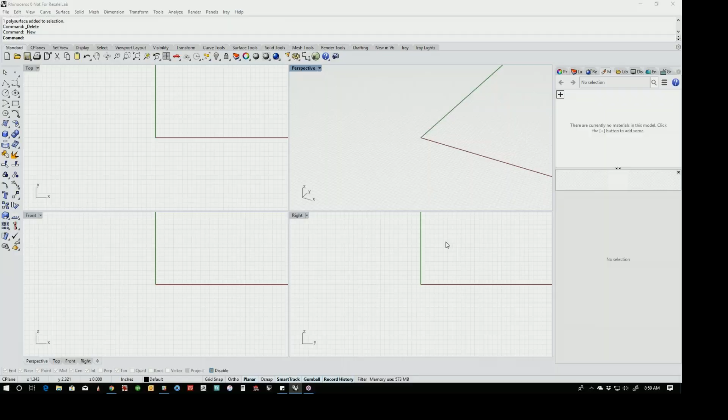I also run the Outside Digital Art and Design, and we like to do these videos probably about once, maybe every month or so. We like to do a Windows one and a Mac one, and the whole concept is it's basically a simple project that we can get through in about an hour, and hopefully I can show you a few of my bag of tricks. The difference between these videos and a lot of videos you'll see is these are completely unrehearsed, which may become very obvious here as we go.

I like to build these from scratch. I do a little scratchy, awful sketch before I start just to get going, just to decide what I'm gonna build, and then I build it from scratch. I've never built it before. It's not rehearsed. We're not Julia Childing anything by opening some layers and saying it looks like this. So we're going to build it from scratch.

If we run into a problem, we're going to fix it along the way because I want to basically simulate the same experience that you have when you sit down and do this stuff yourself. So if a problem comes up along the build, we're going to stop, analyze what went wrong, try and figure it out, and hopefully come up with a solution and allow you to see the workflow in all of its splendor and horror.

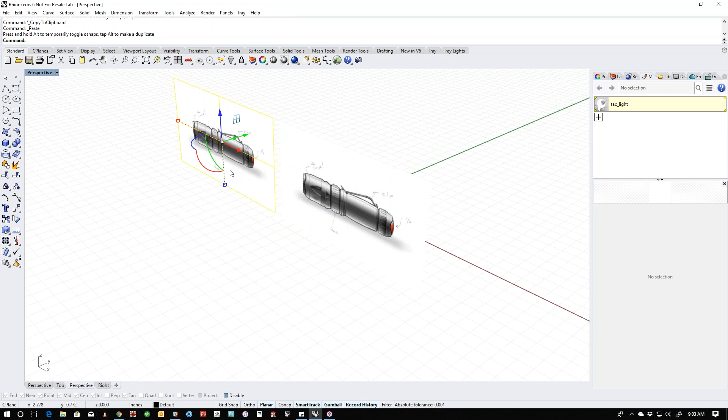When I do this stuff, especially if I'm freestyle designing, I like to start with at least some very basic reference. The picture command allows you to put something in the scene, and it also allows you to do things like - if this was a four view with a front view, side view, and top view on the same image - I could copy and paste this image, move it, place it here, and build a little reference grid. I could also drag this with Gumball and tap Alt, see that little plus that shows up, and make another copy of it, so I could have all sorts of different reference planes as I worked.

In this case, I've only got one view, so I don't need these, so I'm just going to pick them and delete them. But if I were to build over this as it sits, you can see the problem right off the bat.

My curves are black, my drawing is black. This starts to become difficult to see exactly what I'm doing. So I'm going to pick on the picture frame here, and go to the Materials tab. If you don't have the Materials tab open, right-click on any of the tabs that are already showing.

Come down here to Materials and just turn this on. That'll bring up a Materials tab, and you'll see there's actually a picture frame material. You can see the picture down here with the name of the file, and then we've got an object transparency down here, and I'm going to take this and slide it up. As I go up, the image starts to fade and becomes more transparent.

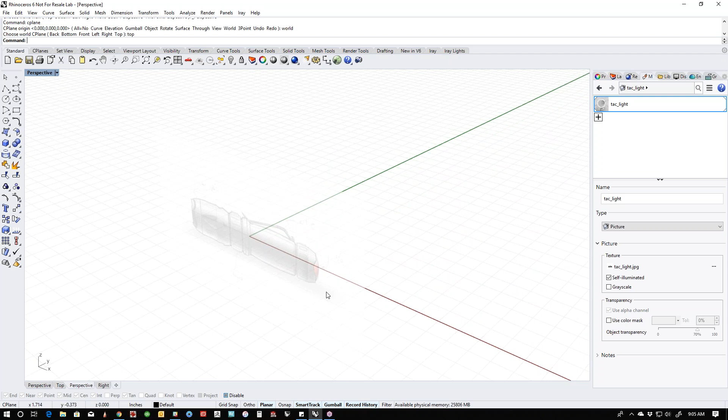And then it's just a suggestion of reference. It's not quite so overwhelming in the scene. Then the last thing I want to do is, if I were to model this, let's say for instance I built something over the center line like this, you can see right off the bat, especially if I go into shaded mode, you can see how the image kind of gets cut in half.

That makes me crazy when I model. I can't stand that. So what I'm going to do is I'm actually going to take this and just slide it straight back in the scene using gumball, so it's out of the area where I'm actually going to be modeling. But in the front view, it appears basically where I want it to be.

So that's kind of the whole concept behind what we're doing. I'm going to just eyeball this thing around the origin, and it's going to be somewhere around here. This is going to be a symmetrical object, so maybe I'll use this as a guide, that little detail right there - it looks like that's about centered. So I'm going to just let that roll right there.

The last thing I want to do with this image is I don't want to be able to select it while I'm modeling, because that's going to be a problem. So I'm going to come to my Layers tab. Again, if you don't have a Layers tab, right-click on here and just turn it on. I'm going to go down here and change this to image, right-click, change this object layer here, and then lock this.

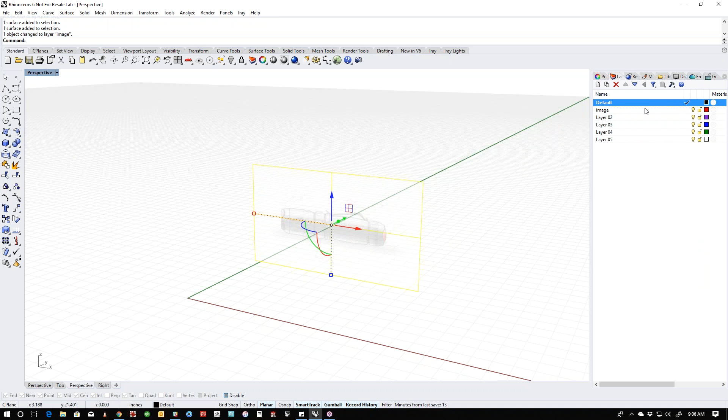I'm going to change my back to default as my working layer, and then I'm going to lock this. So now that this is locked, it just hangs out here. But the cool thing about putting it on a layer as opposed to just locking it using the lock command is I can turn it on and off with the layer, which is really useful.

Especially if I've got a bunch of reference - say I've got a front view and a rear view and a top view and a bottom view and all that stuff, and there's all this clutter in the scene that I don't necessarily need. I can set up a different image layer for each one - top, bottom, front, back, right, left, whatever. And then I can just come in here and turn them on and off as I need. So that's my favorite way of organizing stuff as far as reference material goes.

So this thing is a fairly simple object. If we start analyzing this kind of from a form point of view, we can see right off the bat that this is kind of a revolved object, right? This is dying for being revolved, and then it looks like it's got some opportunities for some detailing that we can either do with booleans, or we can do with trims, or whatever. There's a bunch of different ways we can handle this.

So the things that we have to decide right off the bat are which of these pieces are going to be connected in a single unit. I basically think this whole head is probably going to be a single unit. It's probably going to travel through here, so this whole thing is probably going to be the same. And then maybe I want a material change here or a material change here, some knurling or some opportunities for that.

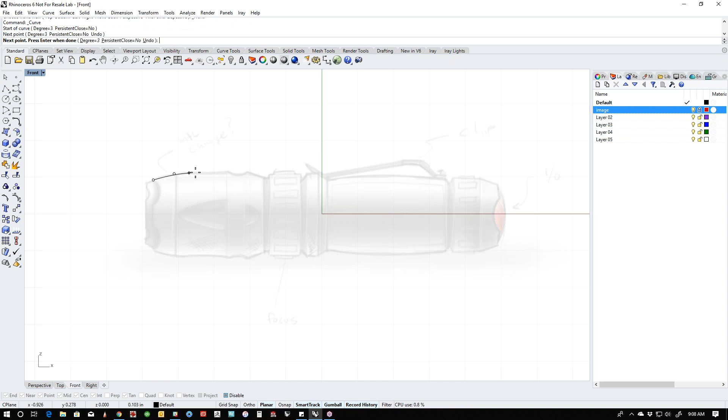If I were to just draw this thing and revolve it, this would all be a single object, and if I applied a material to it, I wouldn't have any opportunities for breaking this thing up and putting detail on it. So instead I'm going to build this out of individual pieces.

I'm going to start with a 3-point arc, then draw a line, then do another 3-point arc, and draw another line. I'm not hitting my arc dead on, so I'll go back and adjust it a little bit. I'll pull this through and come up like this, and because this is a polyline, each time I click it's essentially going to make a new surface.

So if I explode this, each one of these pieces are individual. That means when I revolve this thing, each one of these is going to be a separate surface as part of a poly surface. Does that make sense? So let's go back and adjust, and hit our arc a little better.

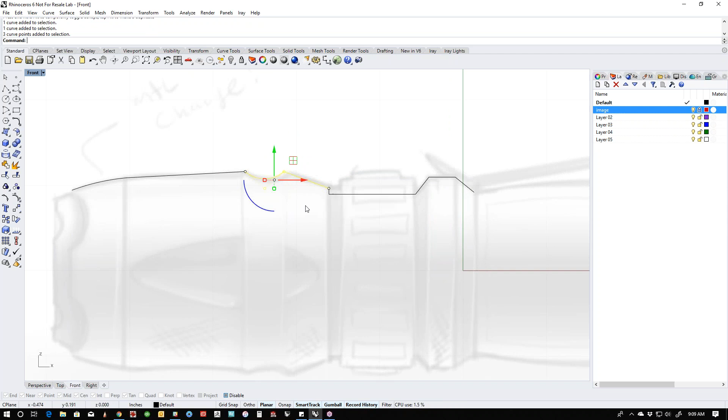I'm going to pick these, turn my points on for all of this stuff, drag select these and move them with gumball. Let's get these guys a little closer. I'm going to use nudge for this because it's super easy.

If you don't have nudge enabled on your machine, let's do that. Go Tools, Options. Down here in Modeling Aids, there's a piece, if you open that, called Nudge. I have it set up to just use the arrow keys. You can have it set up to use Alt and the arrow keys, but I have it set to use arrow keys.

So the nudge key alone, just the arrow key, is going to be this unit. Control plus nudge is going to be that. And Shift plus nudge is going to be that. So arrow key, arrow key, arrow key - Control and Shift add on to that. I find that's especially useful for point editing because it gives you an easy way to get it exactly where you want it.

That's a little closer to what I was hoping for. Let's go ahead and finish this. Again, this looks like a big arc, so I'm going to do that with another 3-point arc. There's probably an official name for that. I'm going to shift drag down this way to place the second point, then just pull the middle point up like this, so I know this point and this point are lined up.

I'm going to just draw this little valley. This comes out here like this, and then we want to get back somewhere to the origin. I'm going to overshoot it because I'm going to trim it off. I'm going to do the same thing down here and draw a center line from zero, which gives me my axis to revolve.

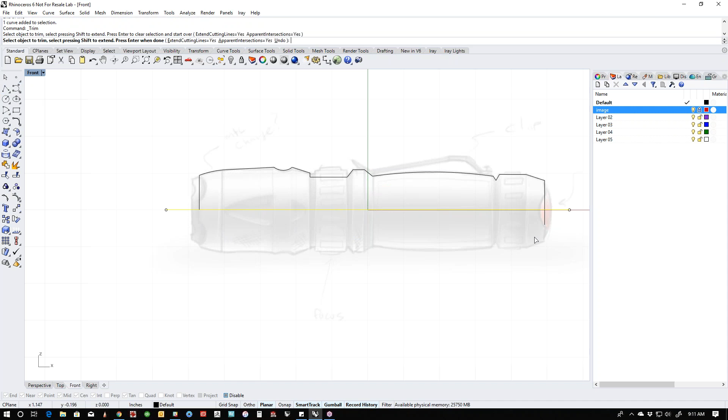Then I'm going to take this entire thing right here and join it, so this is now a polycurve. Now, this actually has a recess in it where this thing sits. I can either draw that now or do it later with a boolean or something like that. I think, just because I tend to be a little lazy - which I like to refer to as efficiency, but other people refer to as laziness - I'm going to go ahead and draw the core of this thing in here so that it's available for me when I revolve this.

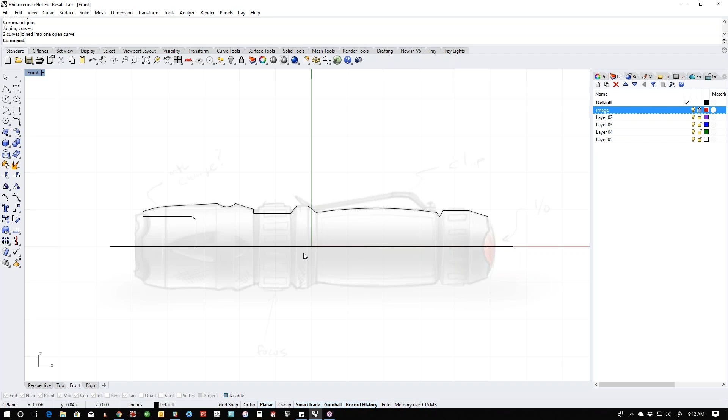So I'll just take this and trim it, take this and trim it, and that gives me, once I join it, the body that I'm going to make. Now I have this piece here, this ring - I might make that with just a cylinder later. So let's just revolve this so we can feel like we're making some progress.

Come up here to the revolve tool. That's our axis, and we're going to do a full rotation. If you look up in the command line, there are different pieces of this word that are underlined - see how under full circle it says U? So if I just type U, enter, I get the hotkey for full circle. All right, and that's basically our flashlight at this point.

Now, there was also a recess down here where the button is going to land, and I'll show you a cool trick for using subobject selection to add that detail later. But let's resolve this thing right here.

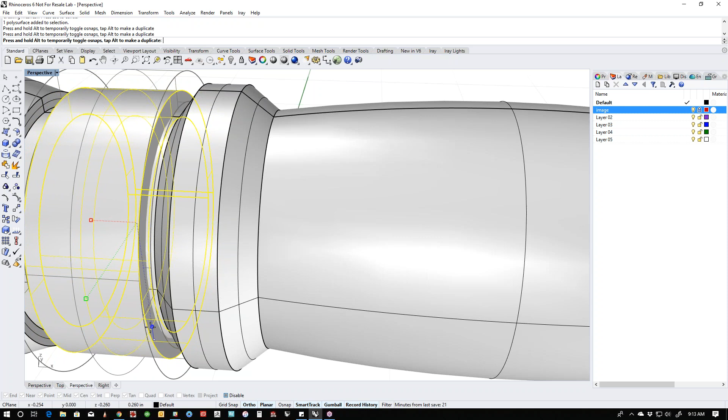So let's put a cylinder around this. I'm going to go to the right-hand view, and let's do the outside ring and then the inside ring, and we can always change this. I'm going to pull this down like that. It looks like I overshot the size, so I'll scale it down a bit, shift drag on the handle. My mouse is dying, it's been misbehaving lately. So I'll tuck it in there like that, and go to the front view, and it needs to be a little wider.

It looks like on my art this outside ring is a little bit thicker. So I'm going to shift scale the entire thing up and then bring this in like that. And if my inner ring is too big, which it's not bad, if we're calling this a rendering or whatever, it's not a hugely massive big deal.

But there's a cool trick we can do. We can shift control click to subobject select part of a polysurface. This is a polysurface, right? If I click on it, the whole thing lights up. If I shift control click, I can click on this inner surface, and then hold down shift, click and drag, if my mouse would behave, and I get a subobject selection, which allows me to make this smaller.

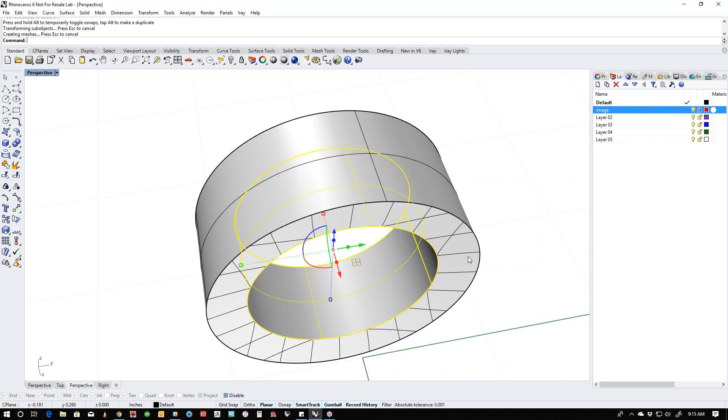Now, you'll notice that this rebuilt. That's because this was a degree 1 surface, and because I scaled this thing, it's actually a little bit narrower than the original one. So this changed from a degree 1 to a degree 3 surface, which rebuilt, giving you this detail here.

I can put this back to the same width, and then all I have to do is shift click, or control shift click, and then put that back just using a planar surface if I need to. I don't even really care, because the other surface was fine. There was nothing wrong with it, it was just a little bit more complex.

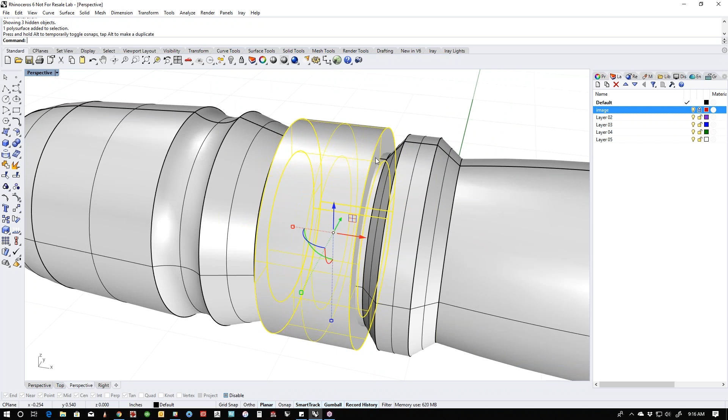So now you can see that we're actually intersecting this. So if I was to do a boolean, I would know that would work. And I'm going to push this a little bit forward, because I want that to have a little bit of space there and a little bit of space there. So this is like a little adjuster ring for focusing it or something like that.

I don't know. So let's talk about the back. Now the back, I should have drawn this so that this little detail was already pulled in like that, but I didn't. So I can fix that by coming in here and right-clicking on explode, and I can extract this surface. And then watch this.

I'm going to shift drag to scale it in a little bit, and this is going to be my wall thickness. Then I'm going to make a little planar surface between there. I'm going to join this back up, and that seems a little counterintuitive, except I can shift control click, and then this little round dot on the gumball, watch this.

I can now just extrude that in and make that little detail. So these gumball superpowers, this ability to subobject select and move things around is really cool, and we were getting into that in V5, but it's been refined in V6 to the point where it's much more useful and much more stable.

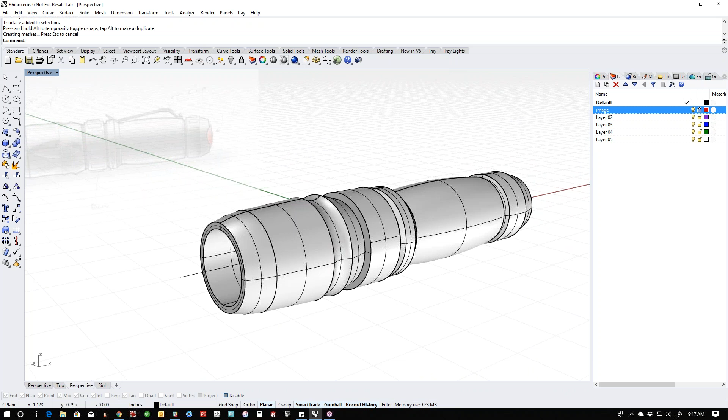All right, so let's start detailing this thing. Let's start with the most prominent feature, which is this kind of finger grip thing here. There's a cool trick we can play with this using history and intersection.

So what I'm going to do is start with an ellipse, and I'm going to... man, this mouse is dying. You know you're a computer nerd when you can ruin mice. This is probably my 3rd or 4th mouse in the last year. So what I'm going to do is pull this thing out,

and I'm going to intersect it in here. You can see that it kind of does what I need it to do, but I don't really know if it's exactly where I want it to be or not, or whether it's the right shape. So how do we figure that out?

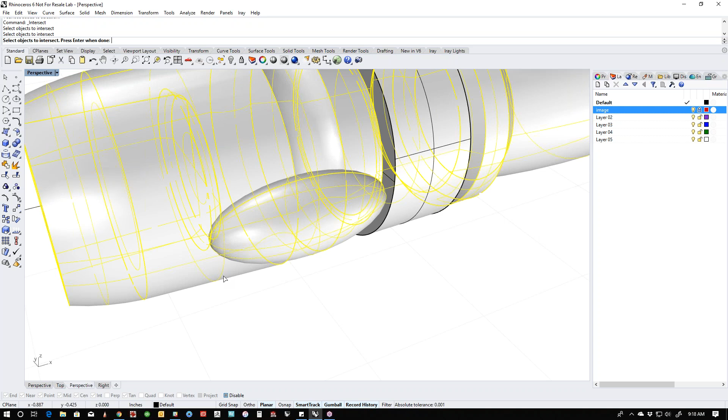First of all, make sure that history is on. Make sure that record history is on, and then always record and update children. Make sure those 2 things are on, and make sure that this is highlighted. And let's go down here to the object intersection, and we're going to intersect this with this.

And you can see what we get is a curve. Now, if I go back to my artwork, I can see that this curve doesn't match my artwork. It's close back here, but it doesn't really match. So what are we to do?

So first of all, let's make this so we can see it. I'm going to go to my properties, and I'm going to change this. Instead of being the display color by layer, I'm going to change this to red so I can see what happens.

Now watch this. If I scale this thing, like say we'll scale it in one direction, when I scale it, my curve updates. So that tells me where the intersection is happening. And it's a little, I overshot it a little bit on this way, so I'm actually going to nudge this thing back a little bit, and I'm going to gumball it just in a little bit, and then I'm going to make it a little fatter.

And I'm getting closer to what I want, right? Now, it's kind of not the right shape, so I can even turn on the points for this thing and edit it if I wanted to. And in this case, it's a degree 2 object because it's an ellipse, so it's not going to edit nicely.

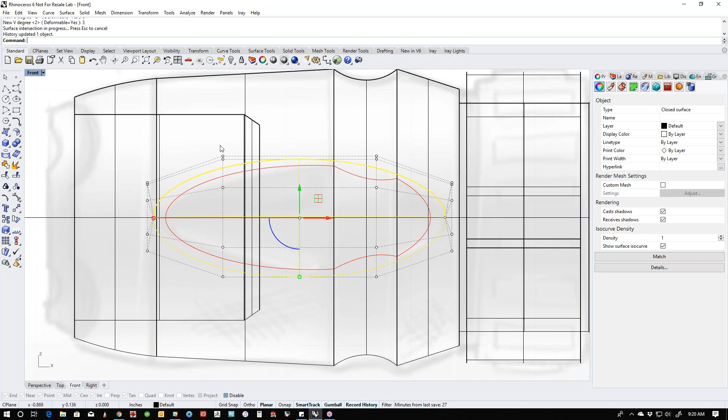So I'm going to change its degree. And if you don't know what I'm talking about there, don't worry about it. It's not super crazy important, but I'm going to just change this and make this a little bit more nicely editable object. So now I've got some points that I can mess with, and so I can come in here and I can scale these points in 1D and see how my curve, I can just sneak up on this.

And so now I know this is exactly the shape I want, kind of. So this curve is matching my artwork more or less exactly how I wanted it to. And I'm going to pull this back a little bit because it's still a little short. There we go. So we've matched here.

We've matched here. I learned this when I did automotive modeling, and it was the way that we made pockets for door handles. They didn't want door handles to be a trimmed surface, and so the pocket behind the door had to be a Class A surface, and so this was the way that you would get the shape of the pocket by using a surface. You'd overbuild two surfaces, intersect them, and then modify the pocket surface so that it matched the shape of the opening that you wanted. And it's kind of a trick that I've kept stealing over the years.

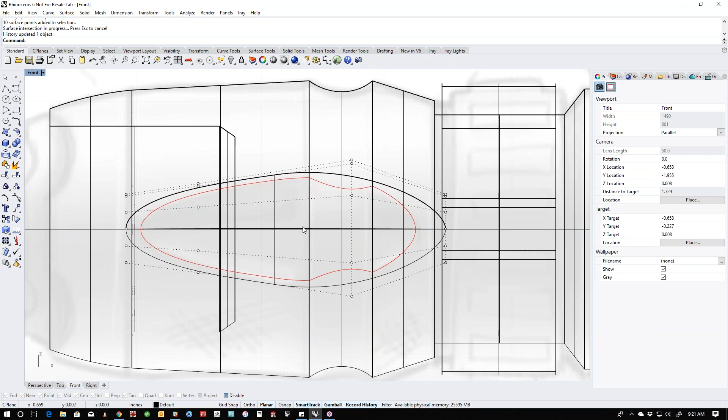Now you'll see that this intersection curve is also, it's getting into this, right? It's getting into this stuff which I don't necessarily want. So what I'm going to do is I'm going to save everything right now because I haven't saved anything yet.

And then what I'm going to do is I'm actually going to come in here, right click on this. I'm going to extract the surface. I'm going to change this to copy, and I'm going to copy this surface. And then I'm just going to hide it. Because it's, actually I don't think my copy went through.

All right, let's try that again. Have to actually hit the right tool. All right, so that's still connected. Let's go over here, right click, copy yes. That's my copy right here. I'm going to hide this for now.

And then I'm going to run my Boolean. And the reason that I'm going to do that is because I'm going to Boolean this. It's going to ruin this surface. I'm going to just remove that surface and then put it back with the one that I just hid. So I know this is in the right spot now, right? Because I've determined that this is making the right type of shape.

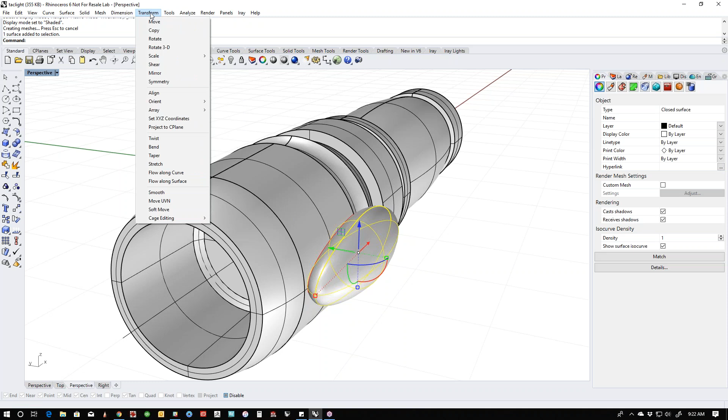So let's do our polar array because this needs to array around here. So tool, transform, array, polar. And we'll do this from the right view. And we're going to just go from 0. Let's do, I don't know, let's do 5 of them. See what it looks like.

So I think that's probably all right. 5 of them is probably enough. If you want to see what it looks like with say 7, you can just change it up here. And that's probably too much. 6 is, 6 probably. I like 5. Let's do 5. And then right click to accept.

And there's all your Boolean objects. So let's go ahead and run that and get the result. So I'm going to Boolean subtract from this using these guys. And if we're living right, this should have worked.

I always keep my Booleans. There's an option when you do a Boolean, by the way. Let me undo that and I'll show you what I'm talking about. Everybody's like, what are you talking about?

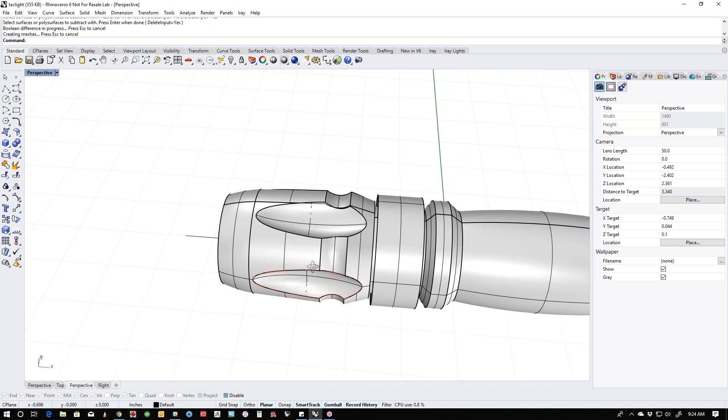See how up here where it says delete input? If I deleted the input, it would just delete those things. But I don't like that option because I like to be able to mess with this stuff later, so I usually keep that. I use delete input no, and that way I just take those pieces and stick them on another layer. The reason I do that is because a lot of my clients are kind of fussy, and I'll do something and then go, I want those to be like 3% smaller, which means I'd have to untrim and redo all this kind of stuff if I didn't keep the stuff I was originally looking for. So I tend to just keep everything.

So let's show that surface that we hid, and let's take a look and see if it makes sense. If I were to stick this back in here, let's just cap this thing, we can simulate what we're looking at. This looks like, now that I'm looking at it, this is going to be a sharp edge, and I don't like that as a design element because it's going to be sharp against your hand. So I'm going to delete this and go with what I've got here.

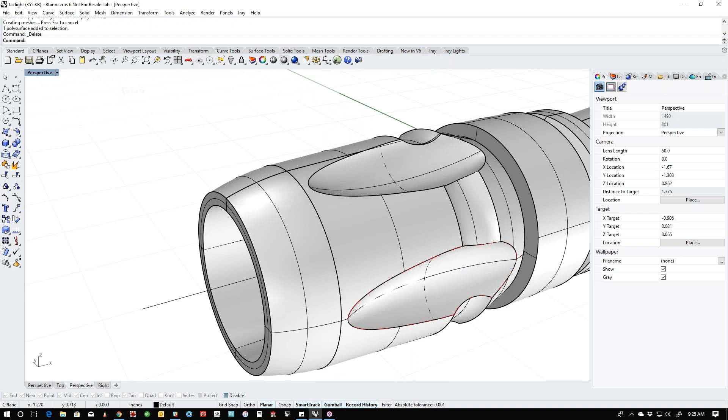But maybe what I'll do is add a little secondary detail that would be interesting through this thing. Maybe it's a ring. Let's try that. Let's see what a ring looks like.

Now what I'm doing is I've used Rhino as a modeling tool, right? Now I'm using Rhino as a design tool, and I'm looking at this stuff in 3D, and I'm making my decisions based on what the thing looks like in real life as opposed to looking at my dopey sketch.

So maybe this has to be bigger. Maybe I want a fatter ring, but I want it smaller. That makes sense. So let's do this.

Let's change the construction plane so that we can actually see what's going on. So what am I going to make the construction plane? Let's make this the construction plane. And if we wanted to, we could actually move the construction plane so that it's exactly where we wanted it to be.

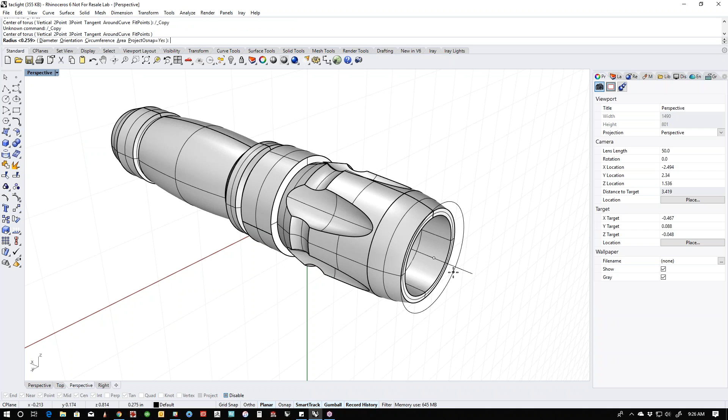But I'm not super concerned about it being perfect. I just want it to be in the same neighborhood, so when I make this thing it's in the right orientation. So let's make this a little fatter.

Maybe this is like a rubber ring or something, I don't know. And that's a little silly, I don't like how that looks. So let's make it a little smaller.

I don't hate that. Not super in love with it, but I don't know. Maybe we'll put a pin in that for now and see how it feels as we're going along.

So let's take a look at this piece. Now this piece, I want to kind of knock the edges off of it, and I'm going to do that just with a simple chamfer. I'm going to come down here and knock these off. This is obviously way too big, so I'm going to interactively just drag this down until I think it looks about right.

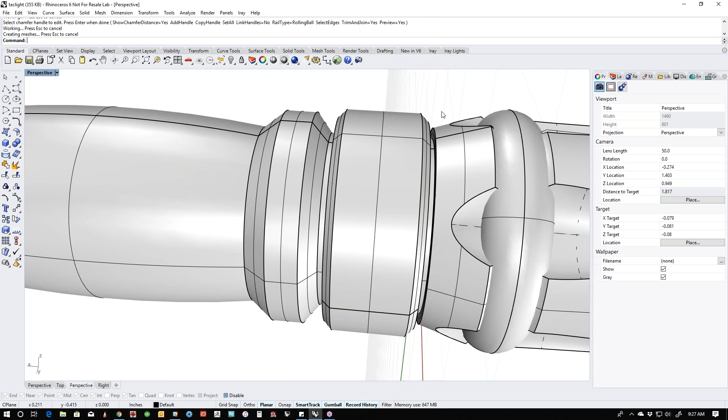And then I'm going to look at this number, I don't know if you can see this or not, but it's 0.024. I'm going to just set this to 0.02, that way the numbers make sense. And then let's preview it, see if we like it. That'll work. So I'm going to right click to accept.

I've decided I don't like this. I'm going to just let that go through there like that, because this could actually be a cool little material thing. This could be brushed, this could be anodized, this could be knurled. We could do some stuff like that. So I'm going to get rid of that.

Make an executive decision. Now this has these little focus rings on here, these little focus pieces. I'm going to just make those with cubes, and stick it somewhere like this. Then let's go to the top view, like that, and center it.

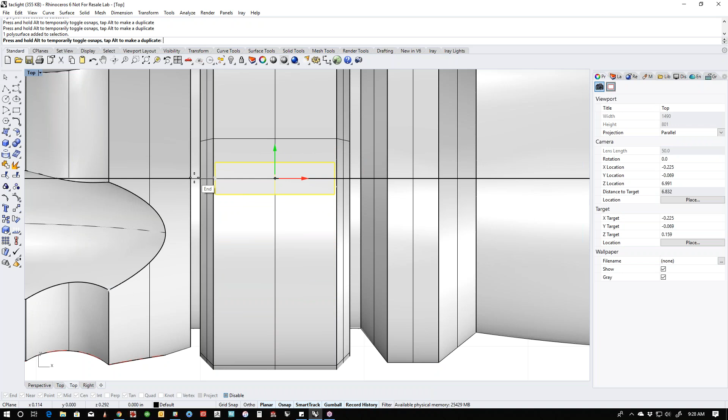Are you guys using snappy dragging with gumball? If you come down to your gumball options, are you using snappy dragging or smooth dragging? Smooth dragging is the default. Snappy dragging is an option, and what it does is allow your gumball to respond to O-snaps, so if I wanted to snap this right here or right to the center, I can do that.

Look at that. You didn't pay anything for this. You're already getting stuff. It's like knowledge, but for free.

All right, let's do a polar array around here. Transform array, polar. I'm going to use the center of this object as the center of the polar array, and let's do maybe 15 of these and see what we get. Now it's in the wrong plane, so let's fix that. I'm going to show just these two objects and hide everything else using the isolate command—watch this, boop, everything goes away except that.

So let's polar array this again, now that we can see it. Transform array polar 0, and let's do 15. That's probably all right, we could maybe do 17. Maybe 22—yeah, that'll work.

Now here's the cool thing. Keep in mind, we did this with history on. This is our original piece, the parent object, and all the rest of these are children. Watch this—hoping this works.

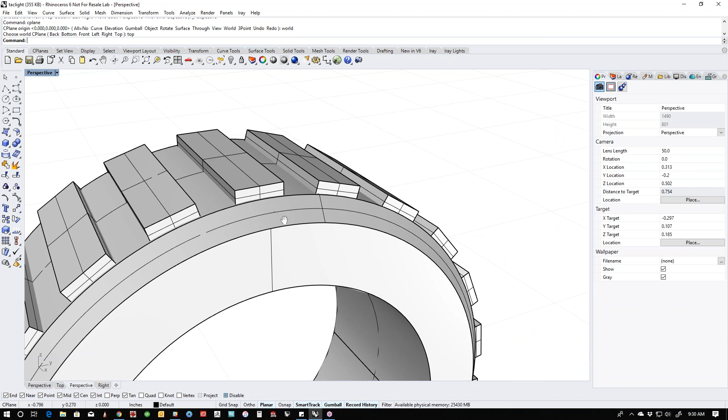If I go in here and chamfer this object using a very small chamfer—set all 0.1, set all 0.01, that's better. Maybe I can go even smaller. There we go, set all 0.005, and I right click it. If I'm doing this right, history should update all these. Boop, and it did.

So now I can make little design choices. If I don't like that to be a chamfer, I can undo it and change it to a fillet, using a very small fillet. Now it fillets all of them.

History superpowers. All right, let's grab all of this and boolean it together. And it did boolean—booleans work much nicer in V6.

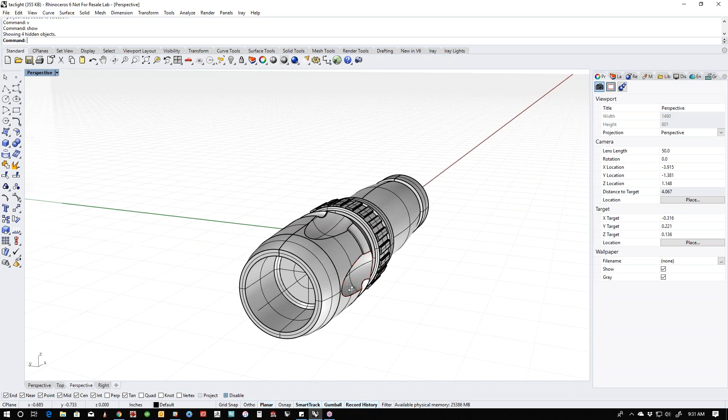All right, so we've got our little focus ring. How are we doing? Everything else is good. Now this thing, if I'm looking at the sketch, it has a little pattern detail in here where the handle has these sections on it that are milled out. And that's actually kind of a tough little thing to do, believe it or not. So let's sort through that.

So what I'm going to do is actually draw this, starting from here. I'm going to draw this, and I'm actually going to project this onto the model. The world's noisiest garbage cans are coming by my house—I apologize for that.

Or garbage trucks. So I've projected this on, and I get this curve, right? Now if I go to the top view, and decide this is kind of where that needs to be, and project this on, I'm using a couple of different views to build what is eventually going to be my trim curve. So I've got this curve and this curve.

I'm going to isolate those, and if I take these and trim them—let's go to the top view—so they're all trimmed together, I've got the curve that's going to make up my panel. So let's take this and join it.

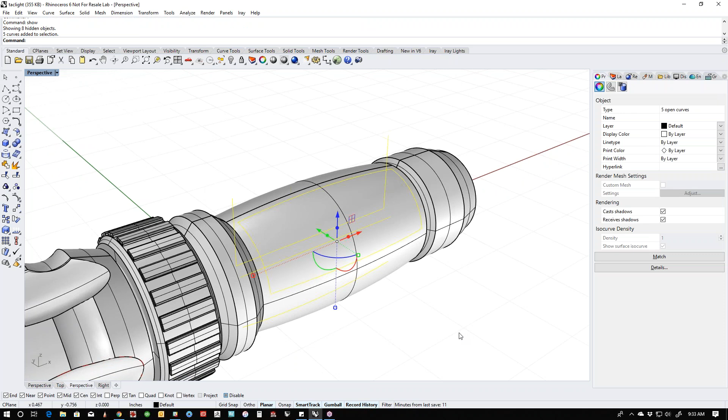And then I can take this and polar array it from the right-hand view, and I'm going to do that 4 times. And that gives me the curves I need in order to be able to split this thing up.

All right, so now I need to work on this particular surface. I'm actually going to extract it for now, not copy it, and take these curves, isolating everything else—actually, I'm going to hide this stuff too. Then I'm going to take this object and instead of trimming it or doing anything crazy, I'm just going to split it, using these 4 curves. And what that should do is give me these panels.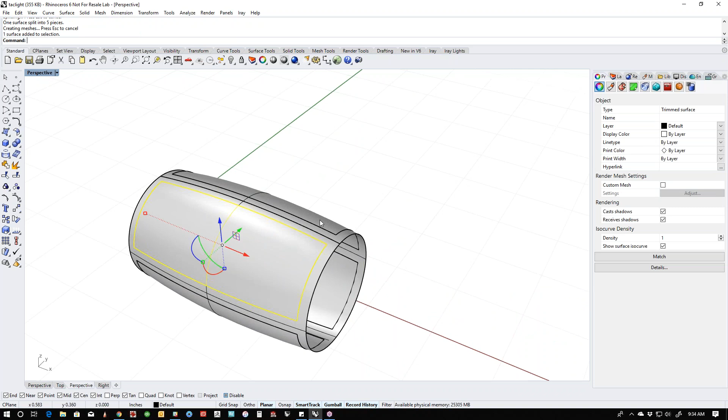Now, there's a couple of ways that we can do this. The cheaty way is to take all of these, go to the right-hand view, and shift drag scale them to whatever you want. And what that's going to do is pull those all in just a little bit. It's also going to suck them in a little bit.

Got to look at them in a couple of views. So they got a little shorter, a little farther in, but also notice that they overlap here, which we don't want. So I'm going to take this side and scale 1D from here. Like I said, this is the cheaty way of doing it. It's not super crazy accurate, but it'll work.

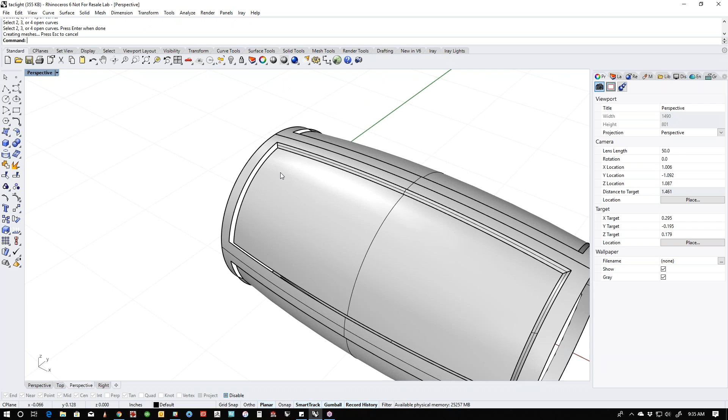And then I'm going to take these and just mirror them across the center line using the mirror command. So now I can simply go through here and loft this stuff, or use edge curves, 2, 3, 4 curves, whatever I want. Doesn't matter, however you feel best attaching this stuff.

Now, the other thing to notice is, if I look at this from the front view, I have the same problem. See how these are dipping under that a little bit, and that's not necessarily what I want. So let's fix that. I'm going to take this and scale it 1D straight up a little bit, and that fixes that problem.

Now, the cool thing about this, since this is symmetrical, if this is the panel that I like, join it, go to the right view, transform, polar array. It should drop it in there so that all that joins up.

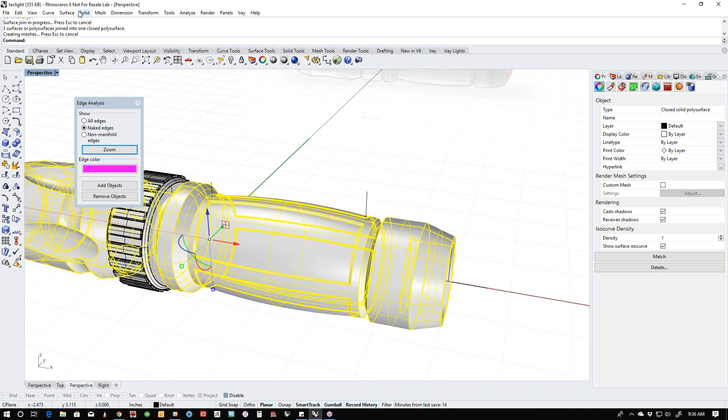And we can check it by using show edges, which lives down here. And so we've only got 2 open edges on either side. The pink is the open edges. So if we bring this back, join it back up, closed polysurface, which is what we want.

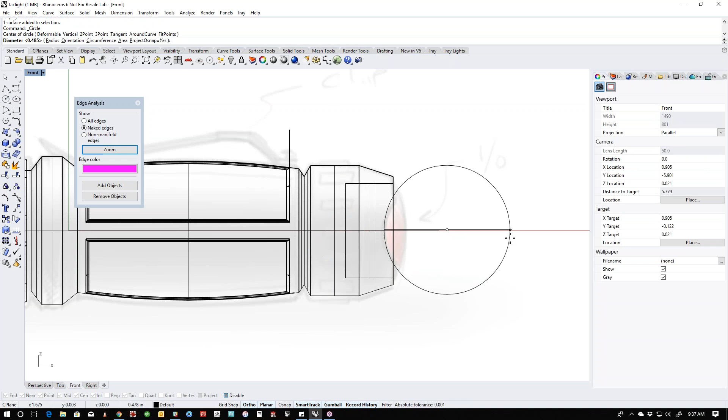But let's get this first, and I'm going to just simply wire cut that. That's going to be easy. So I'm going to draw a circle that matches, run the wire cut command, and run that right through there. And what it does is it just takes that wire and rolls it right through there. Like I said, I keep my boolean objects, so I manually delete it later.

So let's pull some gumball superpowers and make our button on the end of this thing. Watch this. I'm going to shift control click, start dragging, and tap alt, and it makes a copy of that surface. I way over dragged it just for illustration purposes. I'm going to use snappy dragging, and stick it back to where it came from, somewhere in here like this.

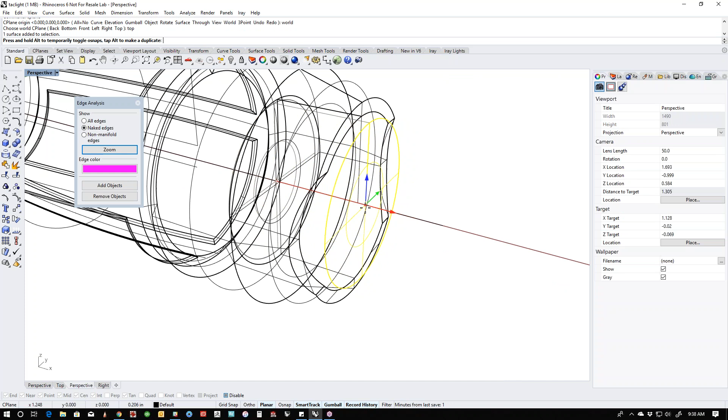Actually, let's go to the front view and wireframe. I'm going to stick this down in here like this. Maybe I'll overshoot it a little bit, shift drag for scale, and then start dragging this thing out, holding down the control key when I drag, and that gets me a little button. No modeling tools other than Gumball. We just did all that with Gumball.

All right, I want to round the edge of this thing off, so I'm going to just do that with a simple fillet. Actually, I might do it with a blend instead. Fillet on the left button, blend on the right. I like blend because it uses continuity as opposed to a circular fillet. It gives a little bit different shape.

So there's our button. Cool thing is we also have a separate surface here that we can use for a little texture blip. So I might actually add a little secondary detail on this thing by shift control clicking, and then just extrude that in a little bit using Gumball. And it gives me a little opportunity for a texture break. This is probably going to be a soft object right here, so maybe what we want to do is just knock the edges off this just a tiny bit.

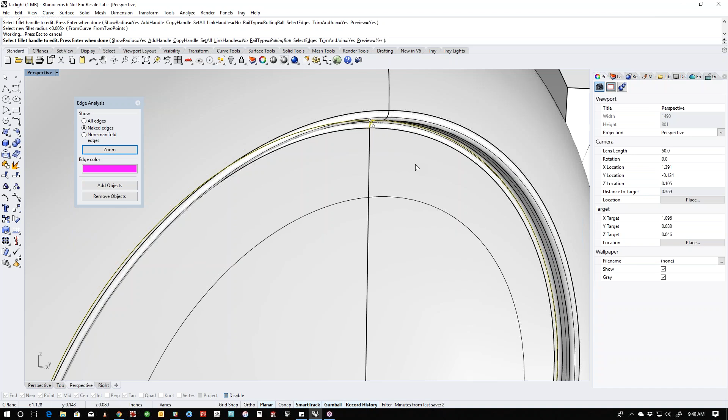Something like that, a little bit less. Don't want to intersect our fillets together. So that's a little softer looking, but still gives us this opportunity for a material break.

And these things are sharp, these flashlights. Every time I was taught in school, anything handheld, you always knock the edges off so it's not sharp. But these tactical flashlights are supposed to be really sharp and pointy. So I'm going to use that to my advantage and not knock all the edges off this thing, and leave it very, very hostile looking.

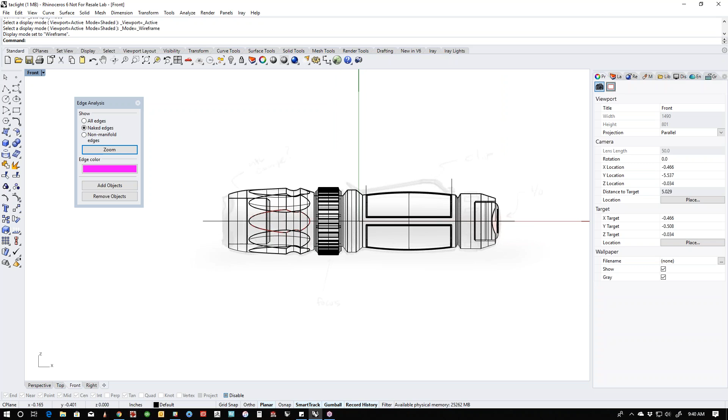It's a very angry flashlight going to the trash. Scares the hell out of the squirrels and the raccoons. I just imagine walking through the park, and somebody comes up to mug you and you pull out a flashlight - back up, I've got a flashlight! I don't know, am I the only one that thinks these products are hilarious? They're fun to model, but I think their usefulness is pretty silly, actually.

Oh my goodness, all right, so let's build these little crown details on here, and these are a little bit wider and a little bit shallower. So I'm going to just draw a circle like this, and I'm going to make a little object out of this.

I'm just going to pull it out using Gumball. And the thing about Gumball, the way it works: if I have a curve and I extrude the curve, I get a surface that's open. If I have a surface and I extrude that, I get an object that's closed. So the curve extrudes into surfaces, surfaces extrude into solids.

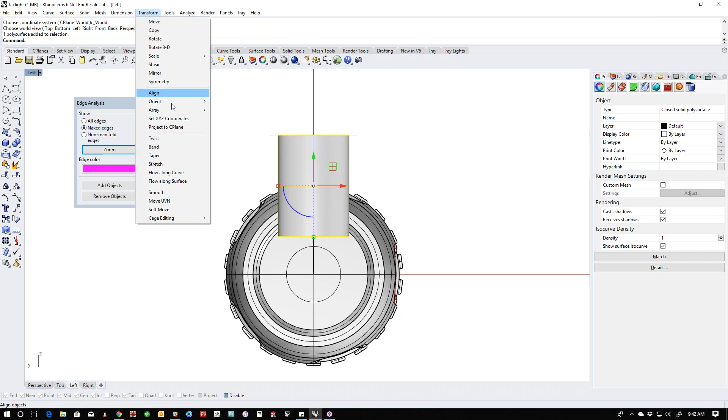That's a little pro tip there, or at least a tip from me. I don't know if you can call me a pro or not, but let's make this a little bit smaller. I'm going to cap it because I want to use it as a Boolean object. Go to the left-hand view so we can see what we're doing, and I'm going to polar array this.

So that I can use it as a Boolean object. How many should we do? Maybe 5? 4 is too few, so let's do 5.

Notice that these are intersecting - see that right there? That's fine, except it may cause a little problem when we Boolean this. So I'm actually going to take this, because this is the parent object and we did it with history, and scale it in just a little bit. See this little piece right there? I want that - I don't want it to intersect in this corner.

So now, because the Boolean objects themselves are intersecting, I may need to actually do this in pieces. Let's try it first and see. I think it may fail, it may not. If it doesn't, great. If it did fail, then what we'd have to do is go back and do each one individually.

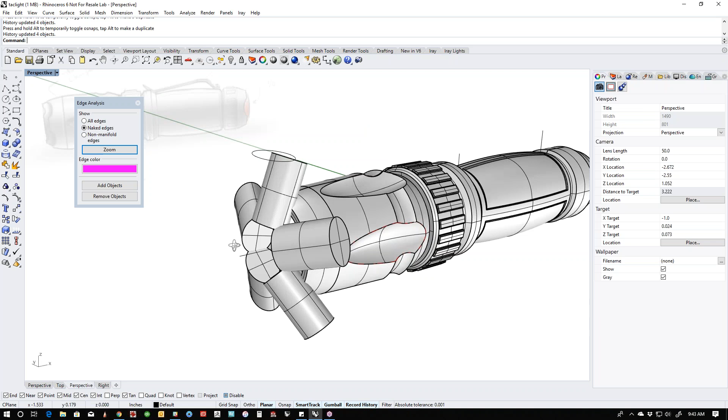Now, this is a fairly flat thing, and if we're really doing a tactical flashlight, it's going to be something really serious. Maybe what we want to do is sharpen these just a little bit by making them a little bit more hostile.

So now this has a little knifier edge on it. Oh my goodness, what has happened? What's happened to us? Flashlights used to just be for light. All right, I'll keep my social commentary to myself.

Inside I'm cracking up laughing. All right, so let's keep breaking this down. See how it whacked off my entire thing? I don't want that, so let's keep going down until I want to have a facet on here, but I don't want to overdo it. So that'll work, something like that.

All right, so we're just about done with this thing. We need to add a little bit more detail on this surface, so let's go ahead and do that. I'm going to extract and isolate, and then let's go ahead and build the pieces for that.

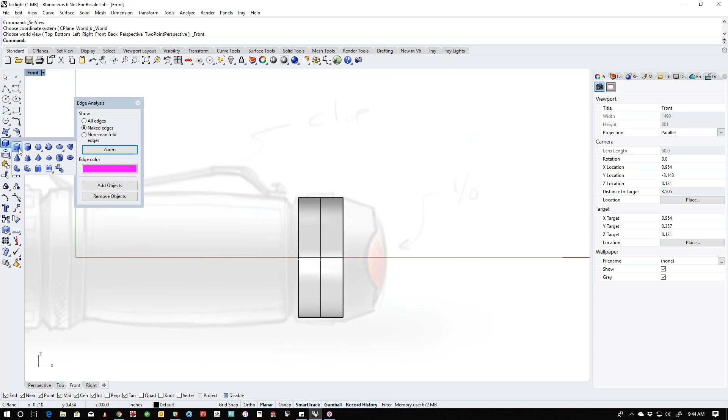And we're almost done, we're 45 minutes in. You guys are probably bored watching this by now, so we'll skip to the end here pretty quickly. Let's add this little detail - I'm just going to use gumball with snappy dragging to center it. Something like this.

Go to the right-hand view. I'm going to make sure that it pokes all the way into this object because we're going to use it as a boolean, and we are going to array polar it.

How many do we want to do? Let's do like 22 and see what that looks like. That's probably plenty.

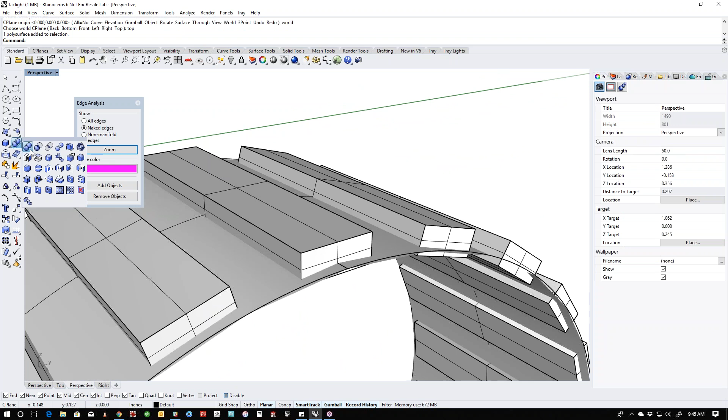Again, this is the parent object on the top, so whatever we do to it is going to translate through. I'm going to match this to what we had before, which was a very small fillet on this thing, and you'll see that history then propagates that through the rest of the part.

We can bring it back, join this all back up so it's a closed poly surface again, and then do the boolean. We could have probably pulled off the boolean using just the surface, but it's always a better idea to do it on a closed object.

All right, so we're pretty close here. We've got this secondary little thing in here. I don't know what that is. It makes it extra hostile for scaring raccoons. And then we've got a clip to make, so we're getting there.

This piece, I'm gonna lie, cheat, and steal and make this piece out of a piece that we already have. So watch this: I'm gonna extract this surface using copy, and I'm going to steal all of this stuff.

I'm gonna join it, and I'm gonna bring it out a little bit. I'm gonna scale it a little bit, and use that for that little secondary detail.

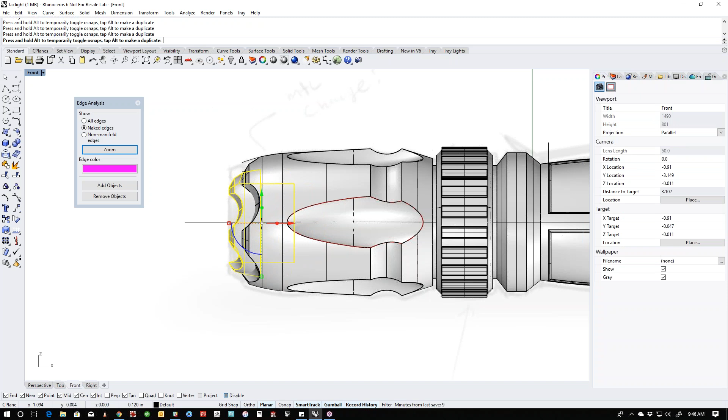Just tuck it in there just a little bit like that. So once it fits inside of there, and we know that that looks all dandy, then maybe we should rotate it just a little bit so it's a little bit more interesting, like that.

And then let's hide everything else, and let's turn this into an object itself. So I'm gonna Shift-Control-Click on this. Again, no modeling tools, we're just using gumball.

I snappy dragged it so that it matched down here, and then we'll just simply build a little planar object and join it. And then that is in there.

Now it's a little short, you can see that, so let's fix that. Shift-Control-Click, I'm just gonna drag it and make it longer.

And that didn't work, so what do we have to do? Let's get rid of this. And let's Shift-Control-Click on both of these, and let's see, can we drag these? Nope. All right, so then what we're gonna do is, and the reason that failed, I believe, is because this object is trimmed in with this.

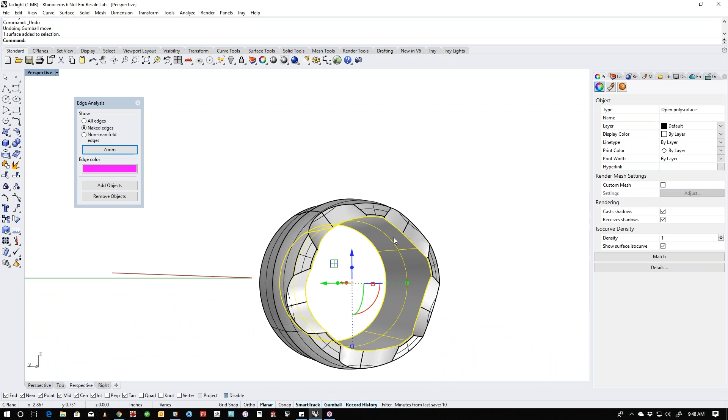So let's just take these two pieces and let's just extrude them. We'll just add another surface onto the end of that. Doesn't hurt anything. Join it up, cap, and now we're talking.

So now this intersects with this, and then these always have some crazy light bulb array in them, so let's go ahead and build that thing. I'm going to use this object as the thing that we're going to build off of.

So let's go to the right view, and then I can see that this is my inside seam, so I know I have to stay inside of that. So let's build, I don't know, some crazy thing that looks like it's got a million candle power.

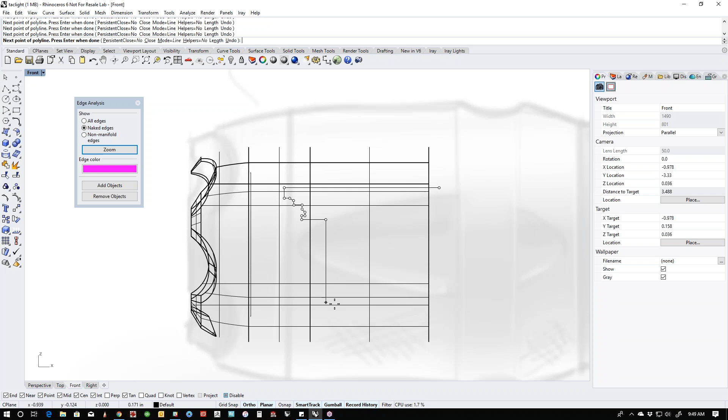Like that. I'm going to go back to my center line and trim that. I'm going to just revolve this.

I like typing the commands because I'm lazy, but the revolve command lives down here. I used it when I first started using Rhino. I was like, man, they make you type commands. Are you serious?

I find that it's actually really fast, so I just type them because I have most of the commands memorized. All right, so that's too small, so let's scale it up.

See how we're using this as a design tool now instead of just a modeling tool? You can see that it intersects there. See how it pushes through, so I'm going to back off just a bit.

And then let's do, let's put our LEDs in here. This thing's got to have like 30 LEDs on it, right? So let's put our LEDs in here, and we'll just deal with whatever consequences come from this.

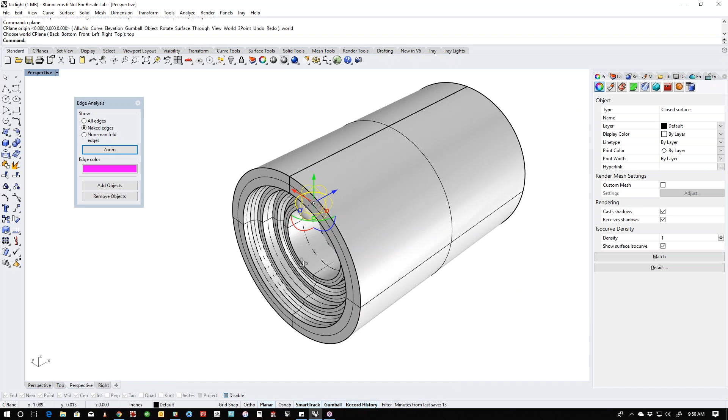And let's pull it down like that. Push it in like that. And then let's, I don't know, let's make this, it's got a ton of them.

So let's transform array polar. I didn't know this was going to be a polar array clinic, but so there's that.

And then let's take, and I'm going to drag, tap Alt, make a new one. Maybe I'll stick it right in the center and make this one gigantic. Something like this.

And I'm going to stick all of these together. Now I'm just making stuff up. And then I want this to look like it's inset into there, so I'm actually going to isolate this. Looks like the Michelin Man.

Cut that off. Cap. Shift Control click, and I'm going to extrude this out.

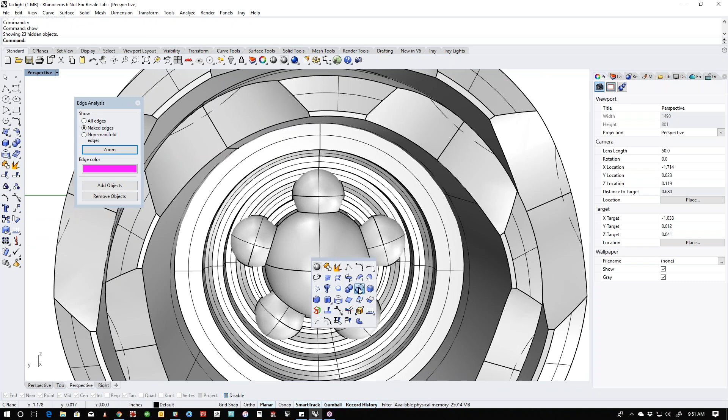And then what I'm going to do is take this thing and use it as a boolean object from this, using that. And then that way it looks like that thing is all lensy.

And then these usually have like a secondary lens over them or something like that. So let's add that in.

Oh, my SolidWorks background downloader is completed. Everybody's like, he uses SolidWorks? Not very often. Truth be told, my daughter's going to engineering school and she was using SolidWorks.

All right, scale this flat. And I'm going to just tuck this in here like this.

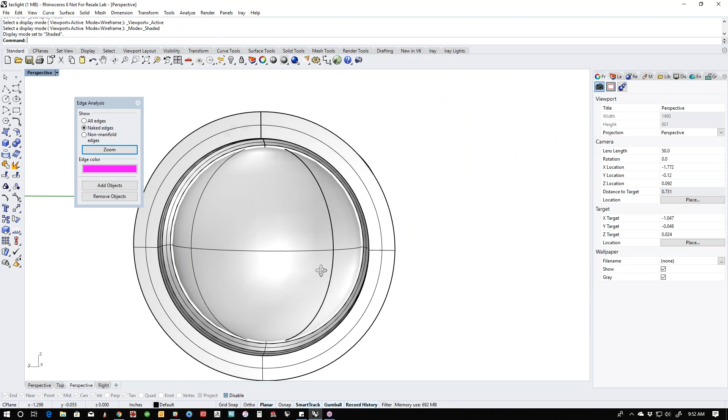We're going to call that pretty much done. So I can take this thing and let's actually construct that lens so it renders nicely.

So I'm going to use this as a trimming object, and I'm going to trim this off back here. It left those little pieces, which is fine. I'm going to just delete them.

And then I'm going to take this piece and join it up, and then that'll be a nice little lens. If I had to, I could add some thickness to that using like a solid offset or something like that, but I'm not going to worry about it.

All right, so let's, come on, voice. My voice is failing, sorry.

So let's add a little chamfer to this thing. That's too much. It's one of the things I like about the previews — you can actually just play with it and get it the way you want it to go. And then it probably is asking for just a little bit more detail in here.

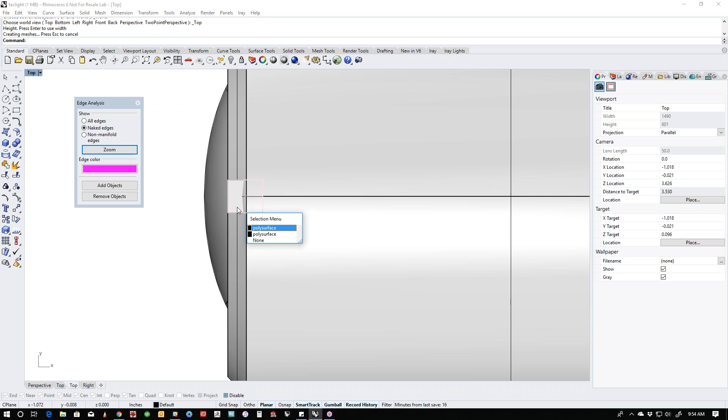So let's throw some of that little greebly, kitbashy, nerdy stuff in there to make it look a little more interesting. In fact, we might even do something cool like this. Let's make a secondary little detail in here out of this thing.

Like that, and maybe even rotate it a little bit. Whoa, not in that direction. Let's do this direction. There we go. Let me do something like this. That might be nuts, but let's try.

And the detailing part of these type of projects are the fun one. You know, it's the fun stuff. You can add this kind of junk forever.

All right, so let's transform, array, polar, center. Let's do like 30 of these. Make it really detail-y.

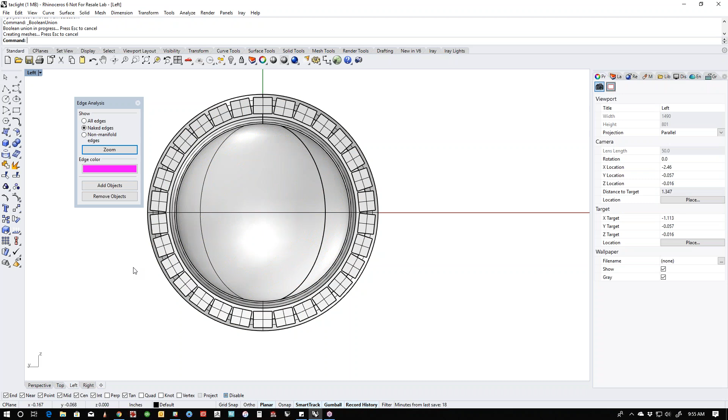It went the opposite direction of what I was thinking, so I think I picked the wrong object. So hang on, I wanted those to boolean in, not out. Let's do this. Okay, so what's going on here? Anybody have any idea?

Something is flipped inside out, and we can tell if we use the dir command. See how the arrows are pointing in? If I flip this — because this is an open object, that's what's causing the boolean to go backwards. Now if I run it, it goes in the right direction.

Now I'm going to need to separate these pieces because it joined these all together when I did the boolean. So I'm going to just subobject select that. That's fine, we'll do that later.

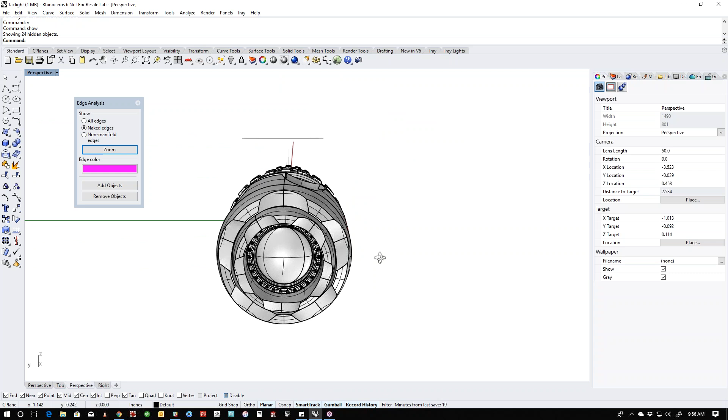And then the last thing I might want to do is just make this a solid object by capping it, that way it's closed. The reason I do this is I like to kind of model in chunks where everything is closed. So that way if I come down here and say select open poly surface, which lives down here, anything that lights up, I'll know if it's an open poly surface or an open surface — I'll know I can't send that to a printer. That can't go to a 3D printer.

Everything else is fine. Let's make the clip really quick, and then we will start getting into some detailing and doing some printing or some rendering. How's everybody doing for time? Everybody still with me?

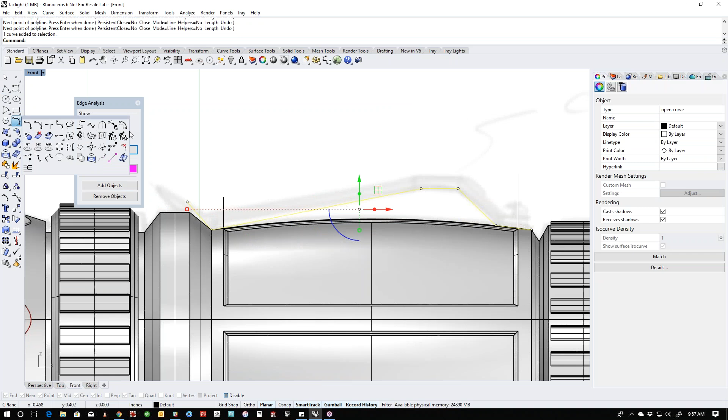I'm going to just offset this curve. It's too much.

Gives me that. Go to the top view. I'm going to just extrude this in two directions — extrude planar curve, B enter, goes in both directions. And then just to make this a little bit more interesting from this view, I'm going to isolate and give this thing a little bit of shape.

Something like that. I'm going to mirror this across the center line. Here's my little cheat for wire cut: if you take the two curves and connect them, then you can wire cut with a single curve instead of having to do two wire cuts. Let's see.

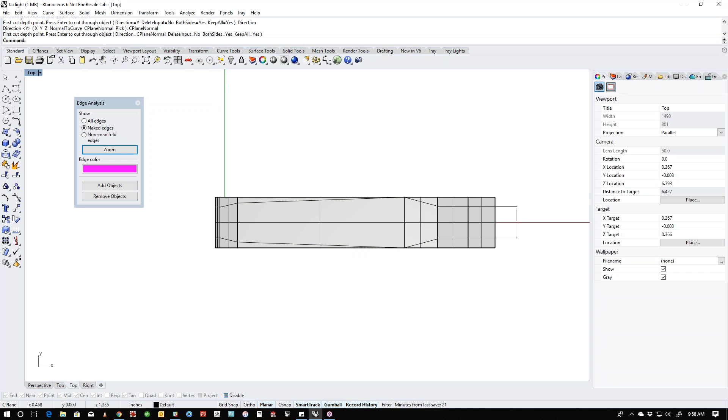It helps if these curves are planar, so I'm going to take this and scale it to zero, and then try that again. The direction it's saying is in the Y, I don't want that, I want it to be C-plane normal. And it didn't do it, so that means it's either not intersecting somewhere or something is misbehaving. Let's try bringing it just a hair in from the edges and try it again. And if that doesn't work, we will... there we go, that worked.

So now we've got the little shape for our clip. And then, because this is a tactical flashlight, I'm going to add some little detail things like this.

Oop, my dog's going to go nuts, sorry. Somebody's at my door, so she's going to go crazy.

Let's do something. Let's take this, let's make this the same height as this. I'm going to just snap that there. And I don't like that. Let's do something different.

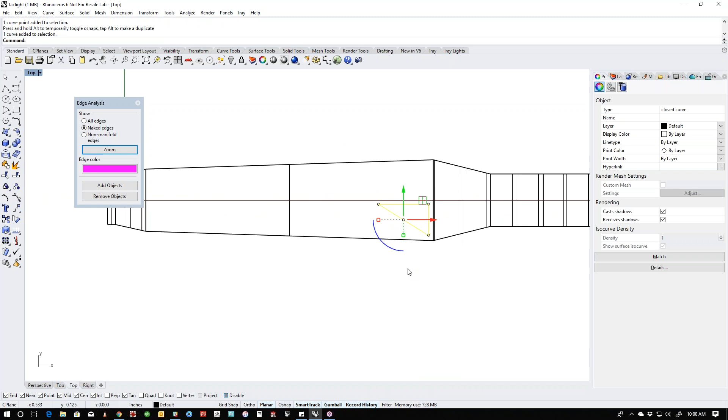This is what I really like about Rhino, is it's not just a modeling tool, it really is a design tool. You can really sit down, and the speed at which you can model things is fantastic, and you can really get to a result very quickly.

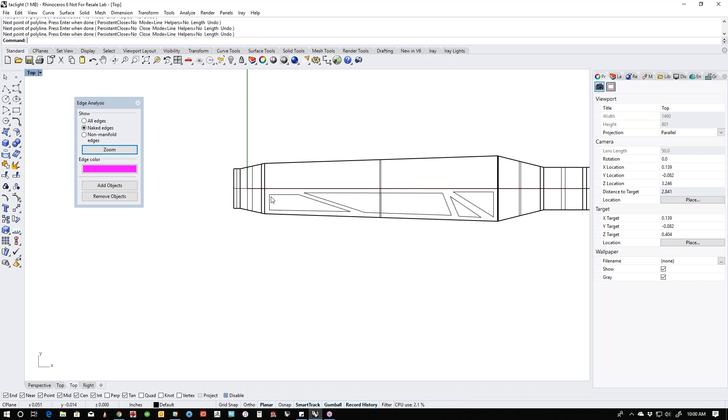So I can flatten this out, and we can take this up here. And you can experiment and iterate and play with stuff that you wouldn't necessarily be able to do in another modeling program, because of the restrictions they'd place on you as far as datum planes and numeric this, and everything has to be blah blah. Whereas here, we can just kind of sail.

So this is kind of a hot mess, so let's turn the points on for all of this stuff, and let's do a little bit of cleanup here. I'm going to select all of these points and scale them to zero, that way I know they at least all line up.

And then I'm going to move this guy over a little bit. Move this guy over a little... whoops, move this guy over a little bit. And let's line all these guys up too. This thing has an angle in it, so I'm going to use the gumball to match that.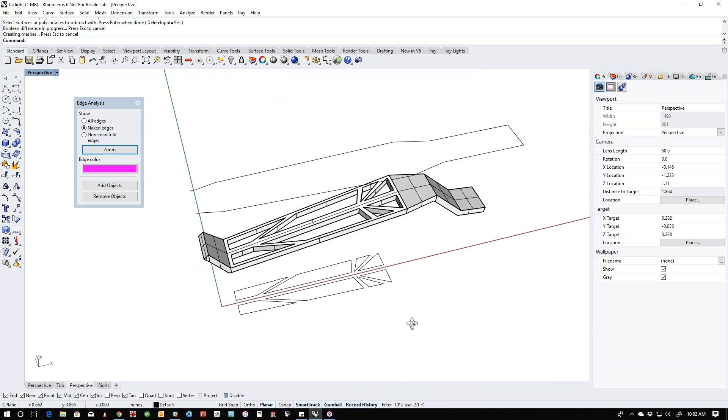And I'm going to mirror this. And then, because Wirecut only lets you do one wire at a time, I'm going to extrude these into objects, cap them, and then do a boolean subtract. And then we get our clip. Add a couple of little screws to this, and we will be done with the modeling part.

And the rendering part's going to go really quick. So let's make a little hex head screw. Cap, boolean, something like that. I'm going to just knock these off.

That way they sit on the surface instead of going into the surface. And that's our thing. So where are we at? 10:03. Ooh, nailed it. All right.

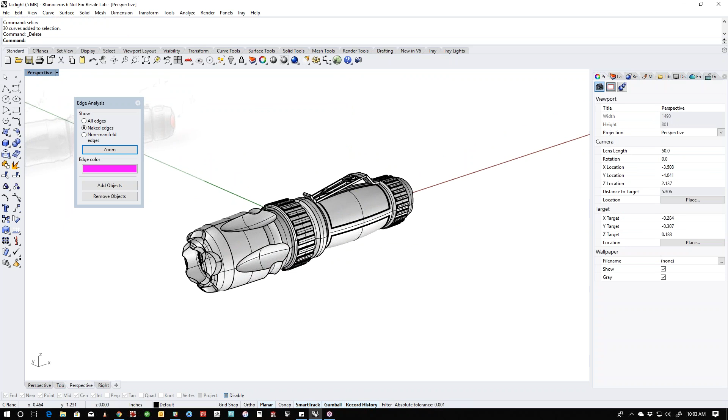Still interested in seeing some rendering stuff? All right, so let's look at that.

So let's go to our layer stack. Let's hide the image because we don't need it anymore. And then let's throw this thing into rendered mode, which is basically this. If we go to the materials tab — again, if you don't have the materials tab, bring it up.

Let's make some materials. I'm going to make a paint material, and I'm going to make this thing black. And just to get rolling, let's just blacken most everything. So you can see that we've got that.

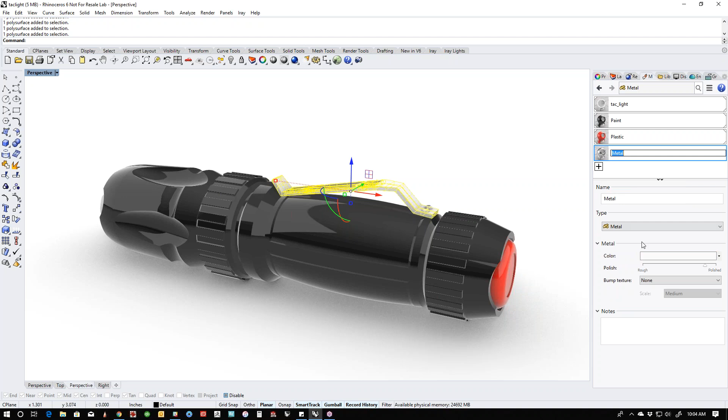This is going to be like a plastic object, let's make that red. And then this is going to be a metal object of some sort. I'm going to make it a little rougher.

And then these, let's make these different — metal object. And let's make these a different color, and let's make them a little rougher.

So there's that, now we can get into some fun stuff. I'm going to make this a paint object, but I'm going to make it silver. Something like that, maybe a little darker. This I'm going to make a metal object, make it a little... something like that.

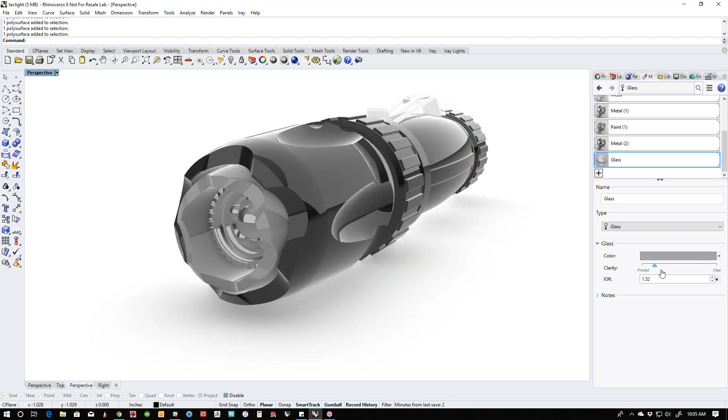And this is going to be a glass object. Let's make its color a little darker, and let's make it not quite as clear. Make sure that's assigned.

All right, so we can then start doing stuff like this. We can start doing sub-object selection things, like we can do these guys — I'm Control-Shift clicking, by the way. And we can do things like this to make that look like it's machined. Same thing with this stuff. Our very scary squirrel-scaring end.

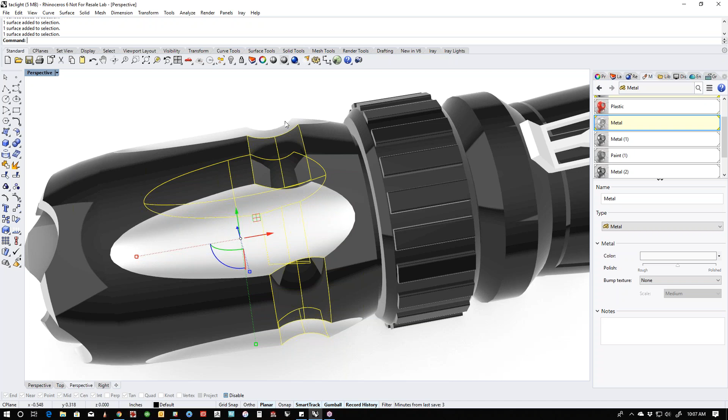That makes it look like those pieces have been machined out. Maybe we do the same thing with this. That could be interesting, but we can play with it. It's non-destructive because we're not pulling the model apart. We can do this stuff and mess with it and decide whether we like it or not.

Something like that. Now let's look at some cool features in the rendering stuff. Like if we make a new paint object, or a new plastic object, by the way, down here at the bottom, you'll see that there's an opportunity for a bump texture.

Let's make this black. So I can grab this piece right here, and if I want that to have a little knurled texture on it, I can come down here and add a crosshatch to it, extra small, and you'll see that this now has this crosshatch texture on it. And if I want to make it even smaller, I can do that.

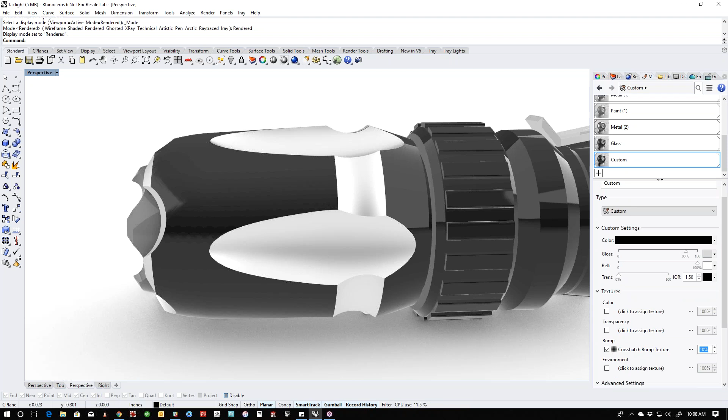Maybe. And it's not super visible, right? We want to make that a little bit more visible. So what we have to do is change this from a plastic back to a custom. Then we go down to the bump section here, and let's bump this up to like 40. Now it's visible.

And if we like that, we can just Shift-Control-Click, assign it to there, and now that has texture. Shift-Control-Click, assign it to here. Now that has texture. See how we can start playing with this stuff? This can be more. I can make this 60. Now it's starting to really show.

Maybe we do it to this piece. So now I can start playing with materials and finishes and start saying, okay, well, where does this thing need some additional interest or detail? And start doing things like that.

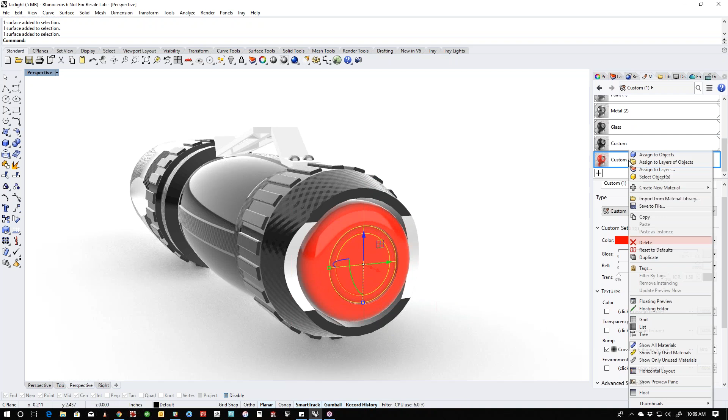I can duplicate this, make it red, Control-Shift-Click, assign it to here, and now that has a detail on it as well.

Or I can change this back to a plastic, I'm going to lose my material, so I can come down here and use a different bump. That one is too large. If it's not enough, I convert it back to a custom, and I bump this up here. Now it's very obvious.

See how with just a completely non-destructive workflow, we can come through here and do stuff that is really pretty interesting. I'm going to hide this, and I'm going to make a plastic material that is fairly transparent and a little bit darker. And I'm going to assign it to these guys.

And the cool thing about this is it does not affect my ability to be able to print this model. This thing is still a closed poly surface, which is really cool, right? I like that a lot.

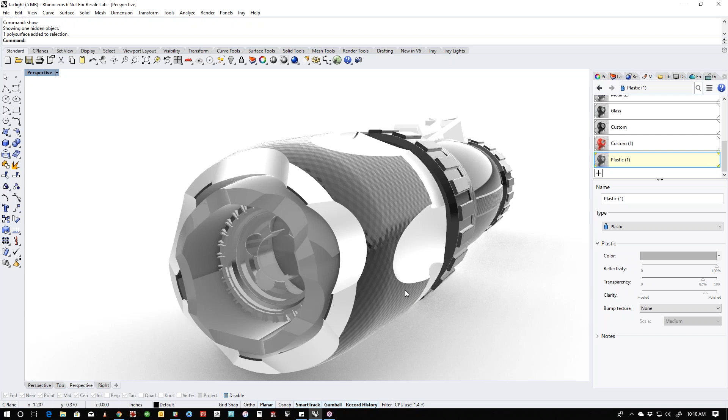So I'm going to do the same, assign the same thing here. I think that glass is a little bit too much.

All right, and then if we wanted to put a logo on it, we could put a picture frame on it or something like that.

The only problem I'll tell you about is because we have sub-object selections made on here, if I add a decal to this, the decals don't show up. So what I would actually have to do is put the decal on an object that doesn't have sub-object selection on it, or remove the sub-object selection, make it a different surface, and go from there.

I think that's a bug they're still working on. So if I wanted to put a decal on here, because this object has different material sub-object selected on it, when I put the decal on, it's either going to remove the sub-object selection, which is what it used to do, or it's just not going to show up.

So now that we have this thing laid out like this, we can just simply go right-click, ray trace mode. It's going to think for a second, and then it's going to go through and actually ray trace this thing. You can see, because we're broadcasting and stuff, the speed on this is not stellar, but you can see that it's actually going through and ray tracing and getting really nice shadows.

Now, the cool thing about ray trace mode is this is actually a working mode, so I can actually pick objects in this scene and still do things to it. I can change material definitions and stuff like that. This knurling is a little heavy now. Maybe I want to back that off just a little bit.

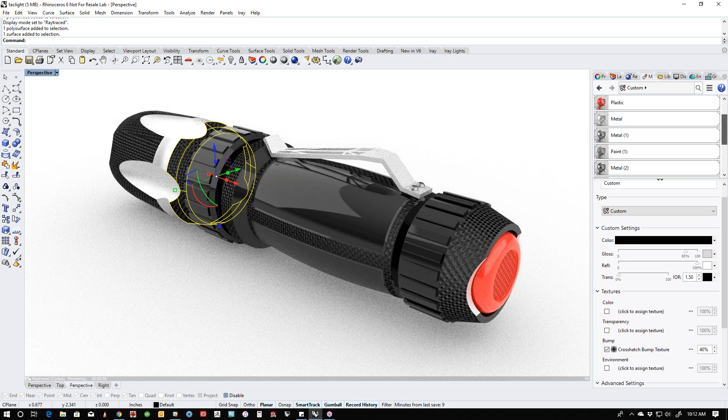I don't like the material, now that I'm looking at this, on this piece. So I'm just going to Control-Shift-Click and put it back to the original paint object.

So you can actually in real time go through and decide what you want to do with this. And if you decide that this texture is too much, you can knock it down a little. And if it needs to be smaller, we're going to click on it here and change the size, and now it becomes a much smaller texture.

See how nice this is? Look at this little spectral bleed right here from the red onto the aluminum. That's how you know you're getting a ray trace instead of something else.

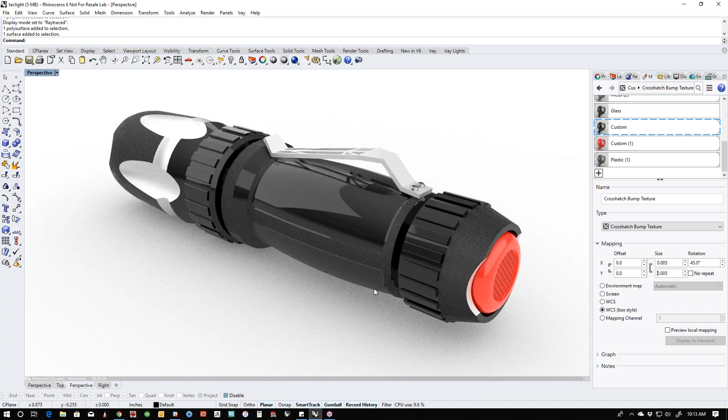So we could let that run. When we're done, we would just take a screen capture of this. We can roll it around to the front, do another view. We can mess with our camera.

Instead of doing a 50mm lens, come on, we can do 35 to get a little bit more perspective and make this thing look a little bit more impressive.

We can also do things like focal blur, which is really kind of cool. If I go to the focal blur and do manual focus and snap from here to here... and then I always get this backwards when I change the settings.

Let's see, it's still thinking. Try this again. I gotta get a little processor bandwidth here in order to be able to get into the settings. Oh, you're not gonna let me do it? That's why we save. It's still going, just not going the way I want it to. Let's bump out of this for a second.

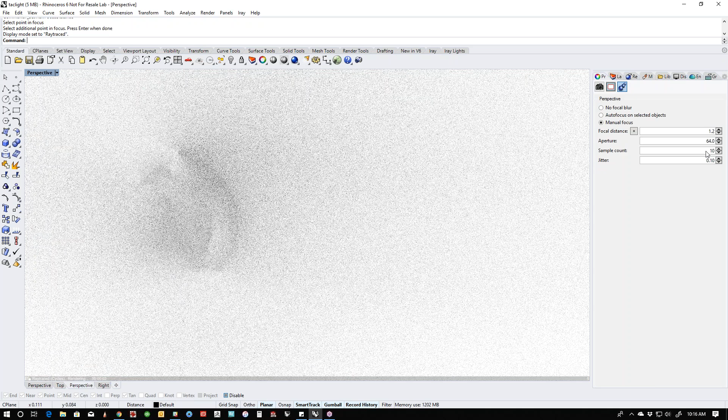All right, that's clearly not what I wanted. All right, focal distance, let's try this guy. Did it get it? No. All right, let's try this. I'll get it at some point.

Nope. All right, I clearly am not thinking of those settings correctly, so I'll figure those out and quit torturing you on my own. But anyways, what I was trying to show you was that the focal blur is something you can set in the scene, and then see that in real time as you rotate around. So I'll get that straightened out for next time.

All right, but at least you got your money's worth. So what else can we show you? Anything else you want to see? Any questions on anything so far? Nope. All right, excellent. Well, I think that's about all I have for you today. We're at 10:17 right now, so I think we've gone over just a little bit, but except for my focal blur snafu, I think we were pretty pain-free.